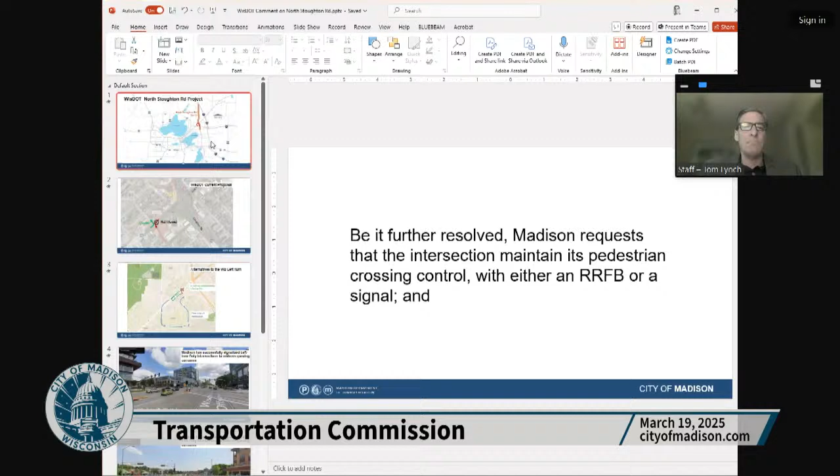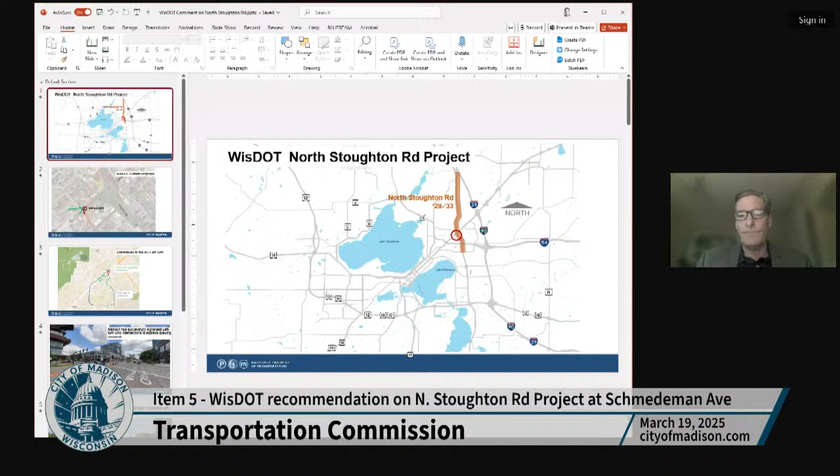Then we move on to item number 5 with regard to WISDOT's recommendation on the North Stoughton Road project. Tom will do a quick presentation. The Wisconsin Department of Transportation released their environmental assessment for the North Stoughton Road project. This project has been approved for funding. The public hearing was last night at Madison College. They are taking written comments until April 17th.

What this resolution focuses on is the southwest quadrant of the Stoughton Road, East Washington intersection. This is what they are proposing right now in their environmental document.

One is a slight realignment. This is Schmedeman right here, where I have the arrows, and they are allowing the eastbound left into Schmedeman, but they are not going to allow a westbound left because they fear that perhaps that would promote development, or promote traffic from development.

One of the reasons why the city kind of advocated for an at-grade solution rather than a jug handle was it allowed the southwest quadrant to be redeveloped into maybe a higher and better use.

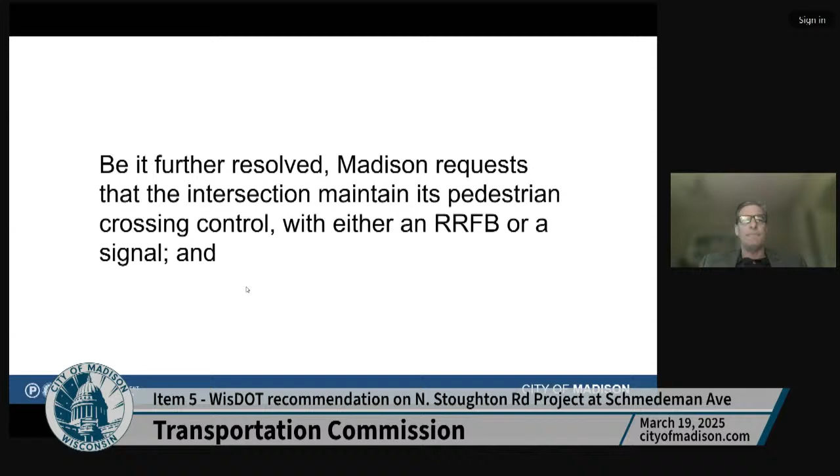I had to get this into the Legistar rather quickly because, as I said, the public hearing was just last night, and so for us to get this in, we had to rush it into Legistar. So I'll leave that at that, and then I'll use this as a talking point. And I believe there are questions.

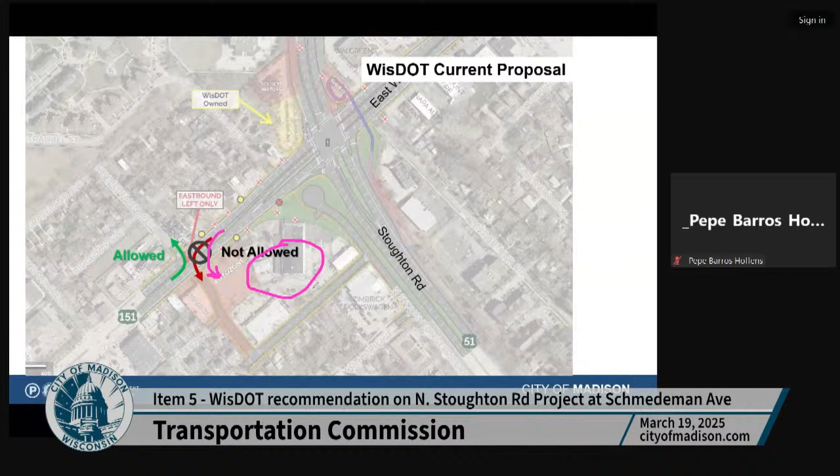Thank you. Chris, go ahead. Thanks, Tom. Just looking for a little clarification on what we are tasked with here, because I see in the text in Legistar it does call for opposing the elimination of the left turn and retaining the left turn with a crosswalk and RRFB. Is there something additional that you're looking for?

Actually, so I wrote that resolution, so maybe we already have the language for maintaining the pedestrian crossing in the Legistar. It looks like it, in which case you'd just be looking for us to recommend approval of that. Yeah, all right, well thank you for that. Someone else should look, but I think so. That's my oversight, you only have to deal with my oversights for one more meeting, but then, so. Well, I guess the question is, Chris, it's,

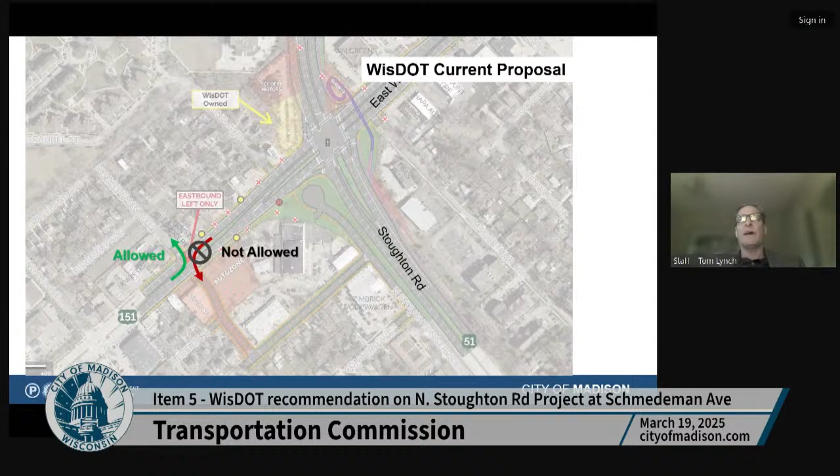It does say, be it further resolved that the city of Madison requests that WisDOT retain the westbound left turn from East Washington onto Schmedeman Avenue within the preferred alternative, retain the existing marked crosswalk and RRFB, with the understanding that future traffic conditions may require partial signalization of the intersection. So does that accomplish what you want, Tom? Yeah, I think that's a reasonable way to approach it. I don't think the Wisconsin DOT will signalize this until there's a need to, but it does maintain the existing conditions, because right now there is an RRFB and a crosswalk. Yeah, so I think it was just included in the body of that last one. That's where you saw it, Chris, is that right? Yeah. Okay, thank you for pointing that out, and I apologize for not looking more closely.

It's okay, I think perhaps people were looking to maybe make a point about it as a separate item. That might be the case as well. Other comments or questions?

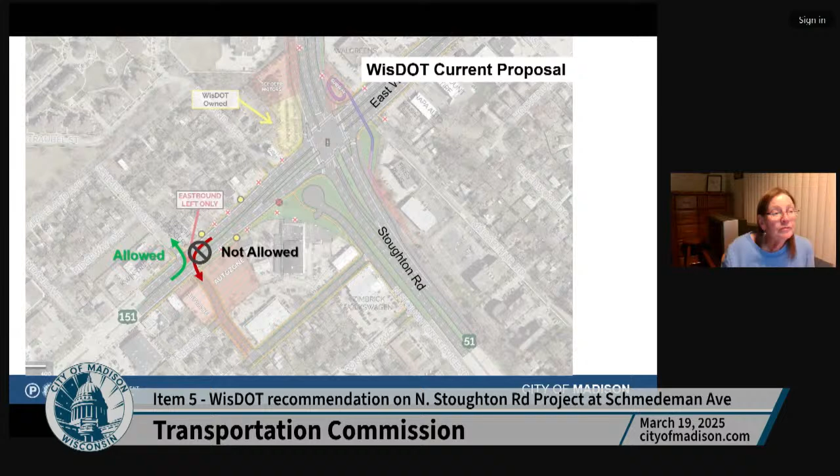We would need a motion to approve, or to recommend I should say, this resolution to the Common Council. If you are so inclined, Robbie? Move that we recommend this resolution to the council. Denise? I can second. Okay, there's a motion and a second.

Robbie, did you wish to speak to your motion? No, not necessarily. I think Tom has laid out the reasons why this is important, and hopefully the alders on this committee can explain to their colleagues why this is important as well. I think it's an excellent point that we have a parcel that might end up being redeveloped, and having that connection is very important, and certainly a connection across East Washington for people walking or biking would be especially important, seeing as how this is the BRT corridor as well.

Thank you, other comments or questions? Any discussion? Any discussion on the motion? Okay, I'm seeing no hands. I'm going to assume a unanimous consent vote unless anybody wishes to vote no or abstain. If so, please raise your hand. Okay, no hands? And it's passed unanimously. Thanks, Tom.

Some of the accomplishments we've done in the last year: pedestrian and bicycle infrastructure, 6.1 miles of path, protected bike lanes and standard bike lanes. I think about 4 miles of that is full-on protected facilities, which is a lot - that's not a small number. That's a lot. 31 separate bicycle and pedestrian projects related to Safe Streets Madison.

We've done speed reductions. We initiated the rollout of 20 is Plenty, and they will begin to reinstitute those, restart the installation of the signs relatively soon. Here you can see the speed limit reductions - we have 8.7 miles of speed reductions.

As I mentioned, the BRT implementation, the fast fare system. Not only did we get new buses, new tracking system, a new BRT system, but we also did a new fare system. This actually was an enormous amount of work - I want to call out Mick Rusch and his team. This was not a small effort. But this is a nicer system, and pretty soon, within a month, you won't even need a card - you'll be able to use your credit card.

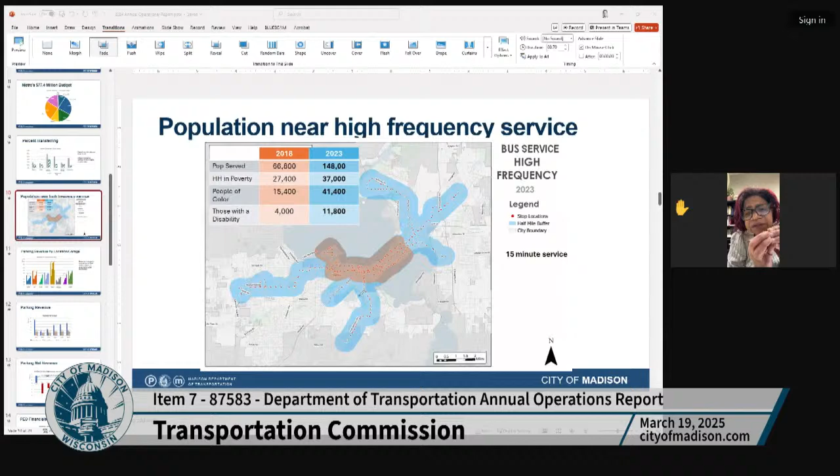I'm on a small screen, so I'm not able to track the yellow and the orange, and I will do that when I'm on my laptop. But what you're saying is that where the concentration is for that, you're equating where people are living with the jobs that they are traveling to, and that, I won't say disconnect, but that's causing this.

Yeah. So some of it, like I'm going to say, for instance, let me just—I'm not able to get it—east of the interstate. Prior to the network redesign, east of the interstate had no service on weekends. No service on weekends. Think about all the housing that's over there. Some of it's workforce housing, affordable, and now it has 20-minute service. So the service has improved considerably east of the interstate.

I think if you look down on Fish Hatchery, Fish Hatchery Road, this has 15-minute service. There's diverse communities on Fish Hatchery Road. So that service has improved and it's excellent. And then if they get the North-South BRT, it will be that much better, right? However, on Verona Road, we also have communities of color on Verona Road, and we don't have a very good service on Verona Road.

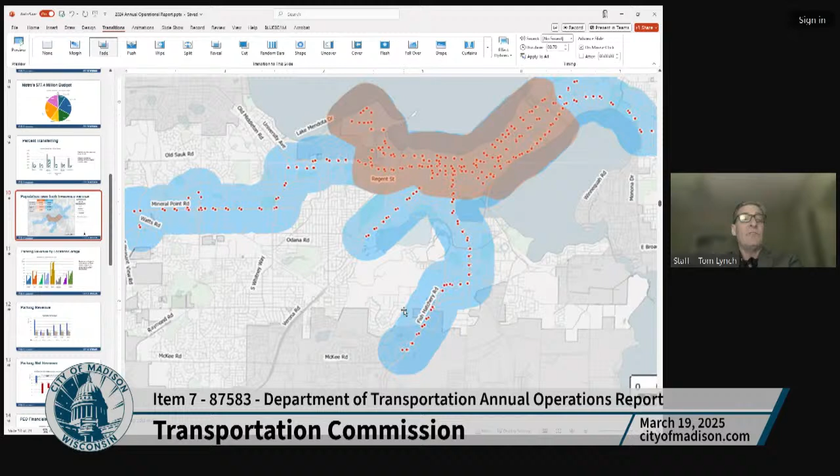I can discuss it more with you as well. But yes, I'm on a very small screen, and that's one of the things I'm really, really interested in. So I can talk to you offline, and you'll be able to help me navigate. So I'll reach out to you. I can help you understand what I understand, but I think there's also a need to acknowledge that we've made considerable improvements, but we're not there yet. Okay, yeah, thank you.

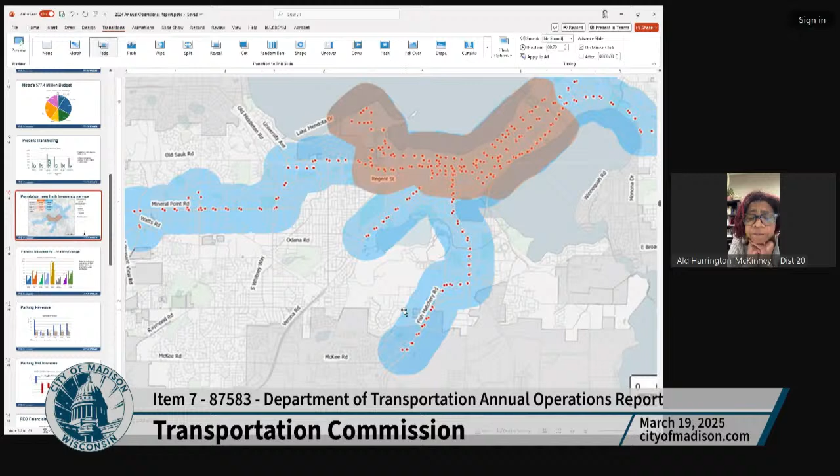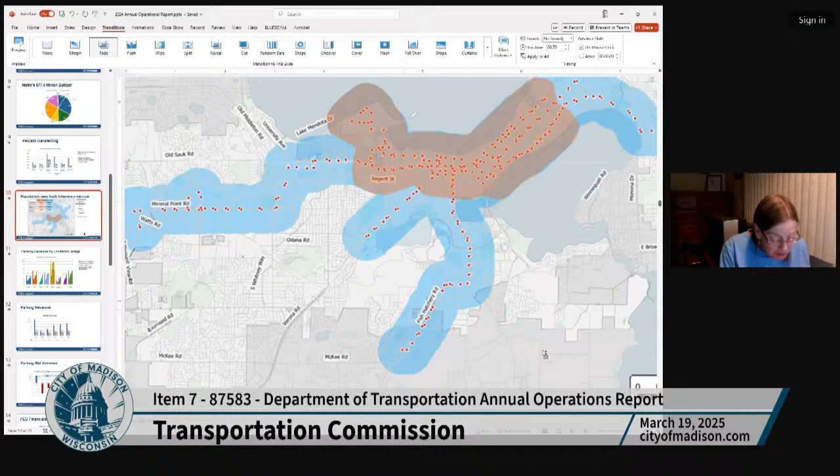Okay, I would like to have a motion to accept the report. A lot of great work went into this, and thanks much for the information, Tom.

We have a motion. Lynn? I'd like to make a motion to approve the report. Robbie? Second. Okay, there's a motion and a second. I think we accept the report, if you're okay with that wording. Did you wish to speak to your motion, Lynn? No? Okay. Any discussion on the motion?

Yes, I really enjoyed that report, and I always enjoy Tom's work. So thank you. I was cheering it quite loudly today while I was reading it. It was really good stuff. Thank you.

Awesome, yeah, thanks so much, Tom. It's great to see all of the work we've been involved in memorialized in that report.

Robbie: Since we're losing Tom soon, I just want to thank him. This report kind of shows all the work that's been done over the last couple of years. And it was a lot of work, and it was hard work, but it was good work, and I just wanted to thank him. I know there's a lot of staff behind him there, and they all worked very hard as well. But this is kind of a great opportunity to see how far we've come in the last couple of years, and I just wanted to thank Tom.

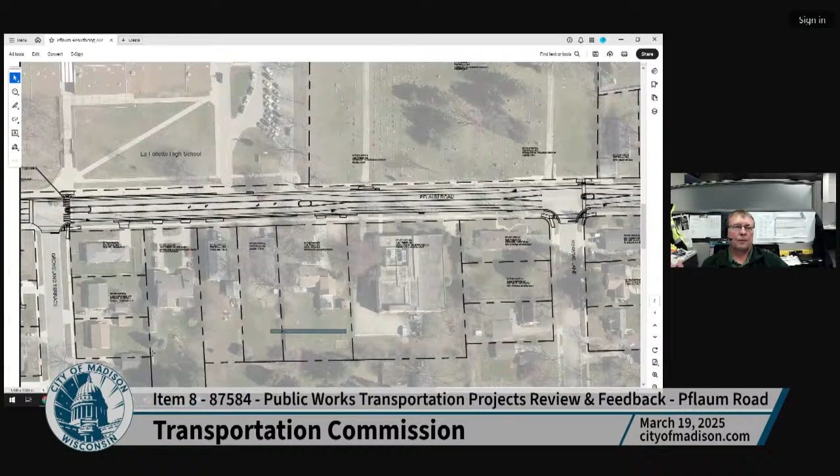We're going to definitely have to work with Metro and the school on how to accommodate bus movements during this phase, because the schedule we're on right now, we won't even be starting this project till late July. If we only did Sponham to the east, we'd be looking at probably mid to late November completion for just Sponham to the east, with all the utility work and improvements necessary to complete the project. Then after the school year, after the school is out in 2026, I think we could easily finish up from Sponham to the west in front of the school and then tie in to what was completed with the Monona Drive project.

The Monona Drive project ended just west of the driveway going into Walgreens. We're going to continue this project through to tie into what was done, I think, in 2014 with the Monona Drive project, to completely finish this construction.

So a couple other things — those are the phases we're definitely considering. For safety and pedestrian improvements, we look to enhance infrastructure and pedestrian safety in the areas of the project, incorporating installation of medians, as you've seen as I paged through the three sections of the project on your screen. We will install RRFBs at Camden Road and Alder Road, and replace the existing RRFB at Groveland Terrace with solar-activated RRFBs.

We're also working with the school to obtain an easement, and we could possibly install a wider sidewalk on the frontage of the school property. Most of the curb and gutter in front of the school property is in disrepair, probably due to buses driving right along the edge of the curb dropping off students in front of the school, so most of that curb is coming up and getting replaced due to poor condition. We're trying to work out an easement from La Follette High School to install a wider sidewalk, and possibly even provide a 3-foot wider street in front of the school to allow a bus pull-out, which I think would be very helpful for students and help traffic move a little better.

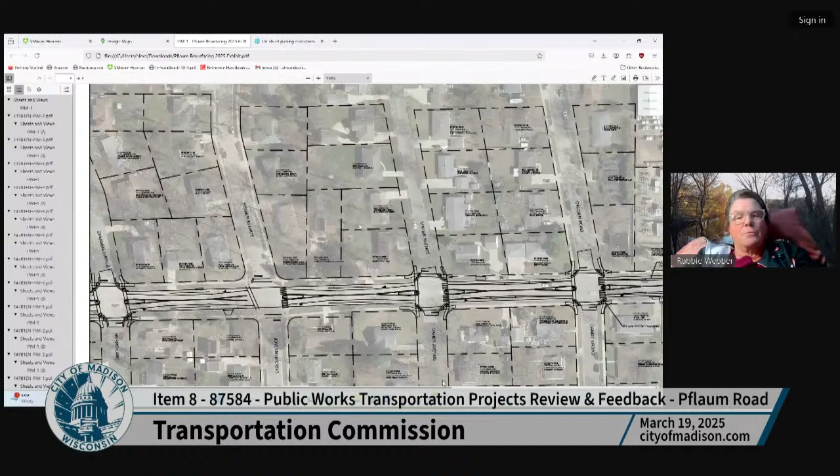Actually, let's just start from that end since I was talking about it. So this is where we were before, Camden. Like I said, we're updating this intersection, putting in all crosswalks, continental, especially for that rapid flashing beacon crossing where that crossing guard is. Could you maybe zoom in a little bit, Alex? Sorry, it's kind of hard to tell how — or screen instead of having all your tabs up there.

There we go, took me a while. So here's that Camden intersection. We're putting in both these islands, which will really help those crossings feel a lot safer and shorter, especially for those elementary students.

Same with Maher, and there's also a bus stop — I think it's either by Camden or Maher. But yeah, these crossings will be much better for both of those situations.

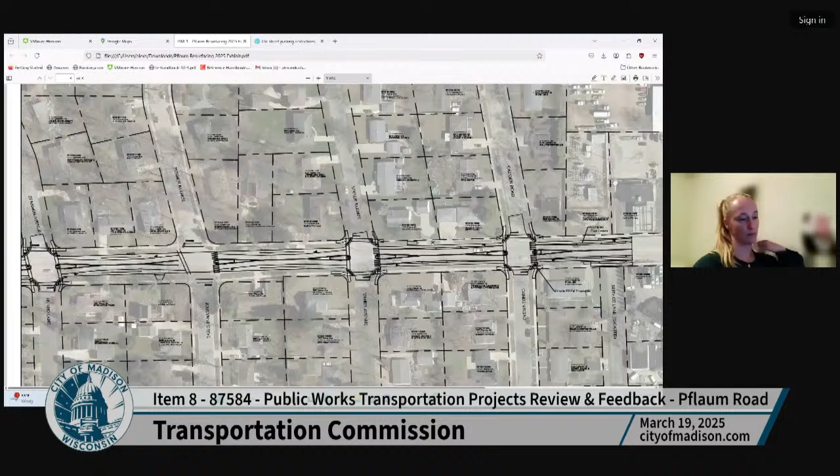From this section, the service lane to Maher, we have those buffered bike lanes currently proposed. We could technically extend these buffered bike lanes to maybe Sponham if we want to remove all this parking. We'll have to get the residents involved since this wasn't brought up at the PIM, but that is a possibility.

But then, sorry, why can't I scroll?

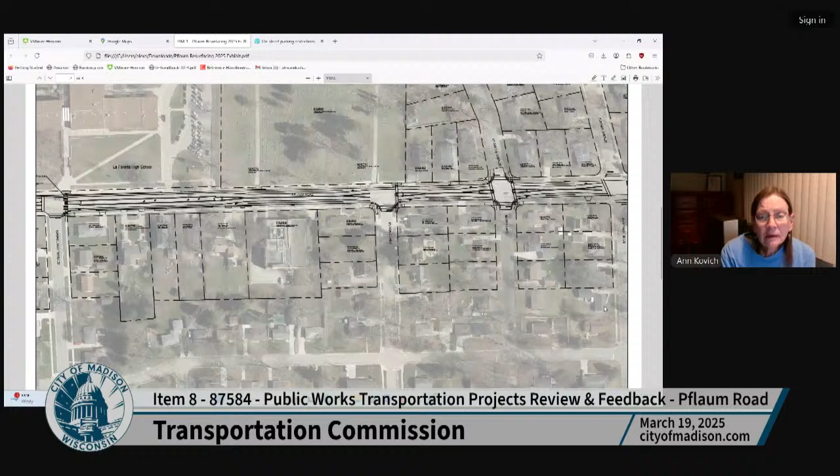But then the further west you go, closer to the school, it gets a little more iffy with turn lanes and whatnot to do buffer bike lanes. Could you zoom again, please? Yep, sorry, my bad. There we go, is that better?

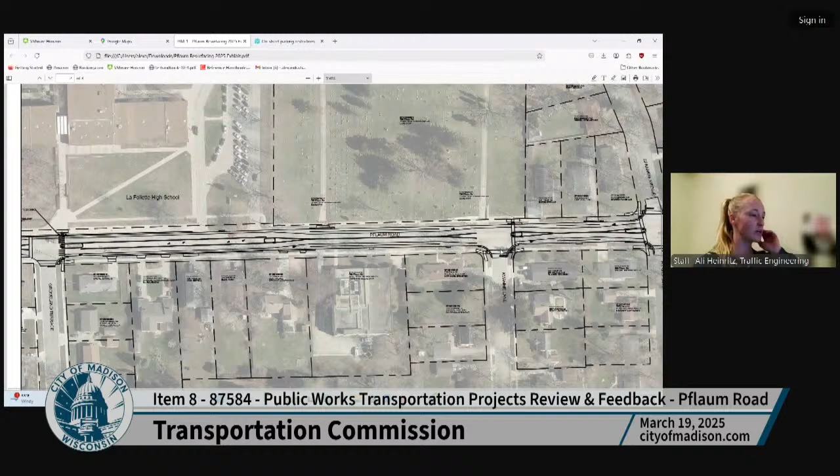Yes, okay. And then this parking, we can do a study on it, but this parking is definitely for funeral services and whatnot for the cemetery, so we might not want to remove this parking here.

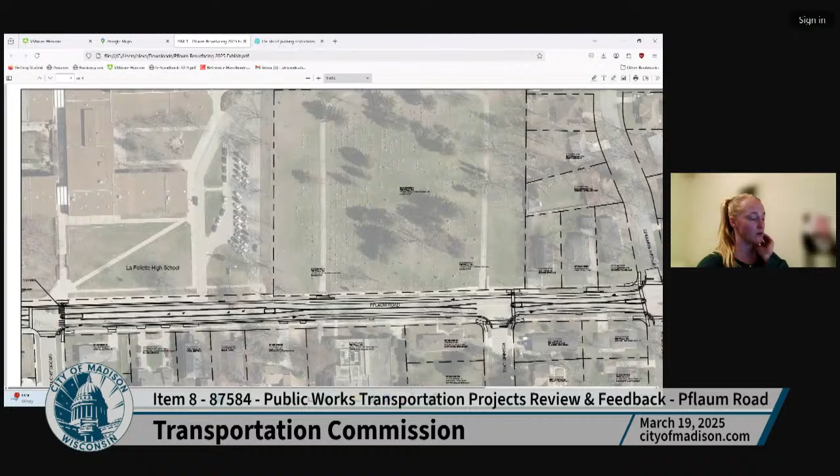Otherwise it's really all the parking other than this. We can't really take away parking here because this is all the bus loading zones, and this serves as drop off pickup in the morning and evenings.

And then down here you have the turn lane, and once you get closer to Monona, you have all those turn lanes.

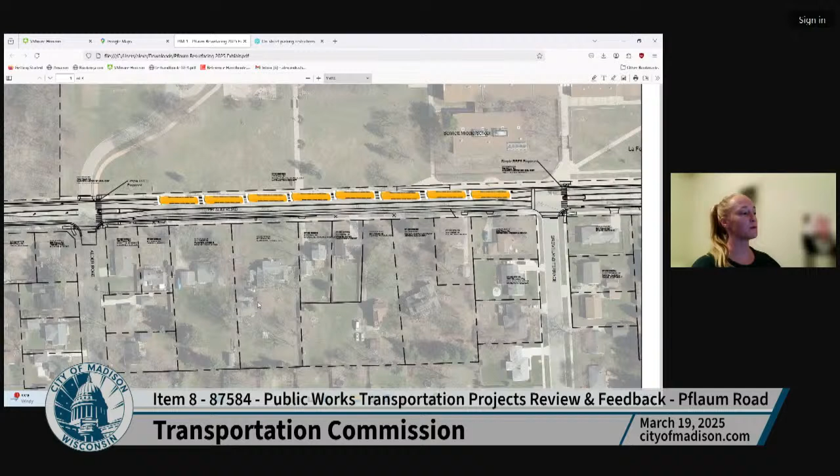But I think we really want to focus on improving all the pedestrian crossings, especially since we're by schools, with island improvements and rapid flashing beacons and whatnot. That really is the focus for this project, since it is just a resurfacing. We're not really moving the curb except for maybe some of that terrace part in front of the school.

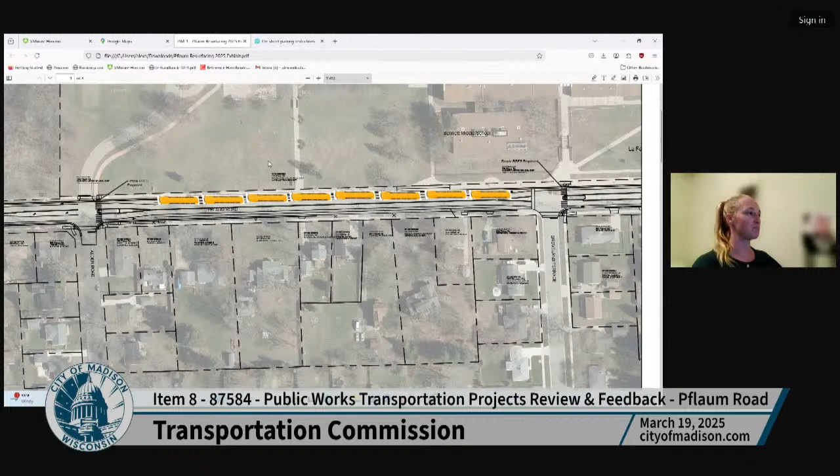But Sean can kind of elaborate on that now, I'll turn it over to him. Yeah, that was a great overview, Ali.

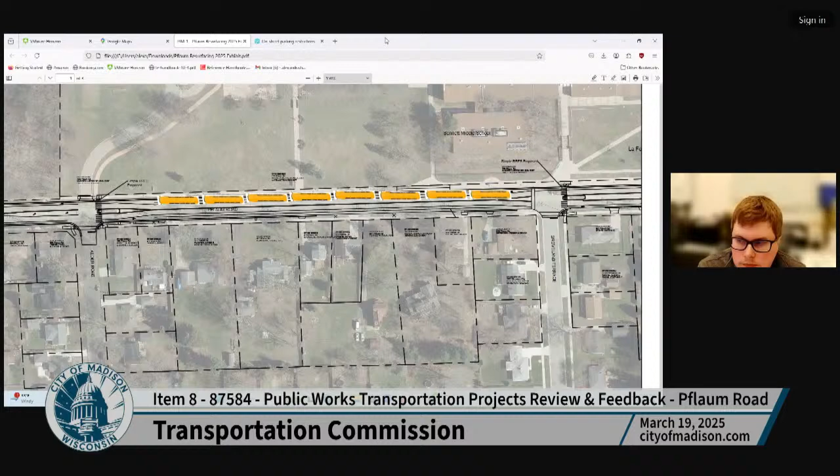The only other thing I want to add is that MMSD is beginning their redevelopment plans for Sennett Middle School. So with them, we're working to expand that terrace and that drop-off lane to better accommodate the bike lane, because the 7-foot parking lane that's there currently really makes the bike lane unusable during those pickup drop-off times.

So they have an early concept, and it's not changing too much from what they have out there. They're pretty much keeping the same drop-off pickup operations, but it's an opportunity for us to get a little more space to get those buses out of the bike lane, and that curb, as Steve mentioned, is in bad shape, so that's getting replaced.

That was one of our main goals of this project, to widen that area. I don't have anything else to add. I think we're probably ready for questions.

Oh, Yang wants to go ahead, Yang. Jump in.

Yeah, I want to thank Steve, Ali, and Sean for going over the project. They did a great job covering a lot of the details. I just want to add something maybe from a bigger picture for you to think about.

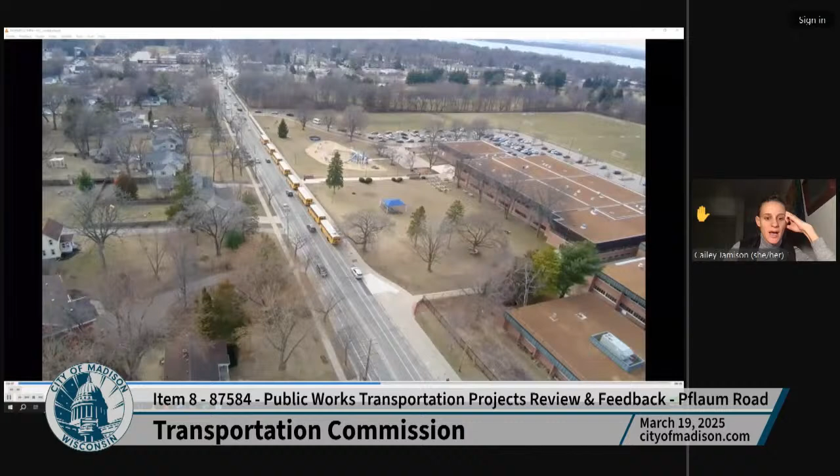Thanks, Anne. I agree with a lot of the comments already made today, but I did see in the public comment a couple of folks asking whether the parking lane could serve as the buffer for the bike lane, flipping that configuration. I'm wondering if that was given any thought. Obviously there's the door concern as well in that scenario, but just curious about that option.

Who's going to take that one? Yeah, I can take that one too.

So in the areas with existing parking, the issue is when we flip the parking to provide a parking-protected bike lane, we need a few extra feet to make that work. We kind of learned our lesson on Bassett Street with the parking protected lane, and we found our minimum widths, what we need from the face of the curb out to the lane line to make that work. I don't think there's enough room here for that to work under the current street width. We would need a few more feet to make parking-protected work.